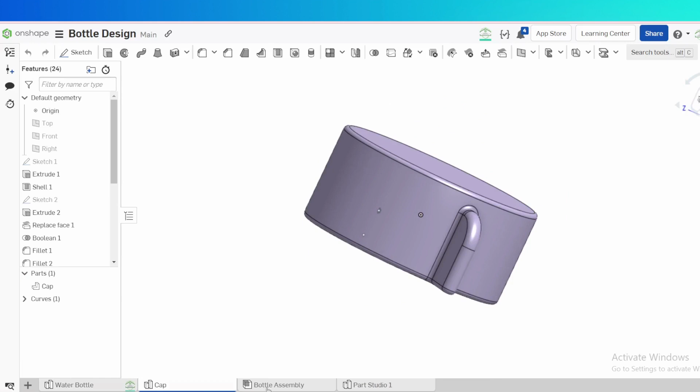Today I'm going to model this bottle in Onshape. I'll be using hybrid solid and surfaces. Then you can model a cup. Cup is simple to model the bottle cup. Then you can do assembly of the bottle with a cup, and you can do some small animation. You can animate how the cup opens like that if you want.

Okay, for me I'll focus on the bottom section. I'll focus on this bottle cup. Not the bottle cup, the actual bottle. I've started an actual part studio that is Water Bottle 2.

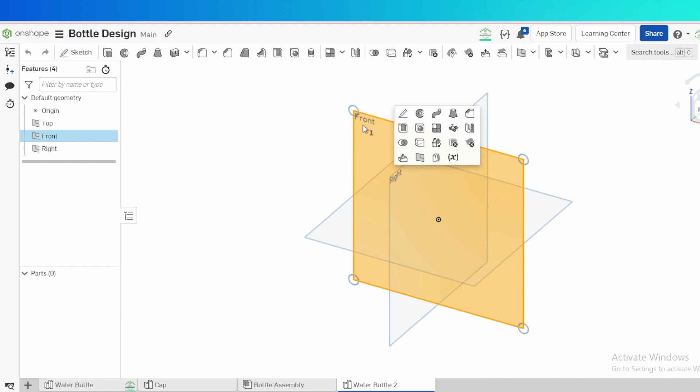Open here, and we need to create our first sketch to define this body. You can see this curve here to define the body. Therefore, we start with an actual body on the front plane, sketch on the front plane.

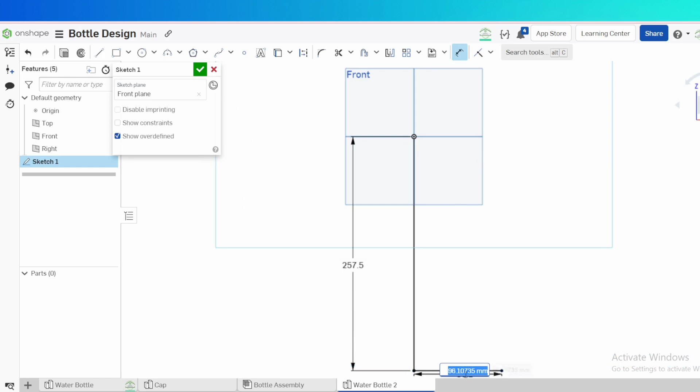First of all I need the line here. Dimension this line as 257.5 mm. Then another line here on the bottom to be 37.5 mm.

You can hide the planes. You don't need planes here. Then another line of length 5 on the bottom here. 5. One here. Another lines now. Bottom top lines like that, like that, like that. This one is 21.5.

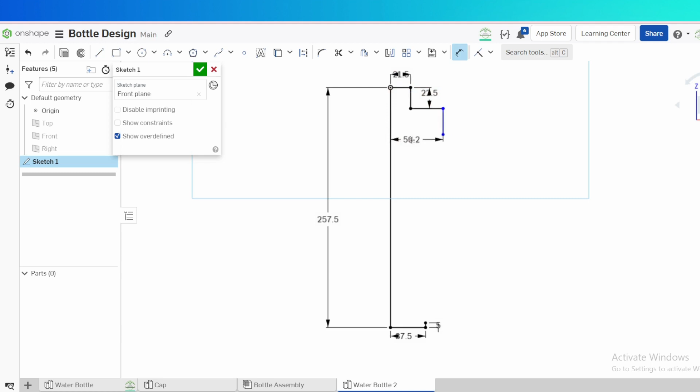This one is 22.5. And from this point to this point is 24.5. This height is 4.

Then we need a spline to connect from this point to this point. Therefore, spline from this spline, first point, second point, third point, and the last point, like that.

Let's now start dimensioning these points. Start by this one here. The length of this is 8. The angle here is the angle of 120. Then the length of this from here to here is 42.

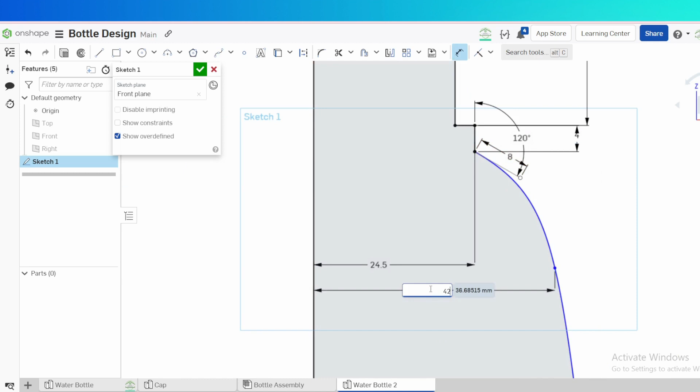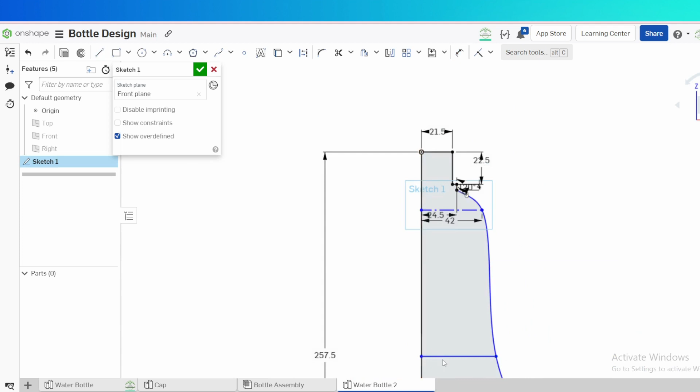Let me use a construction line for ease of dimensioning. Then another line here from this point to the line dimension line. Let's put a line here for ease of dimensioning. Therefore, from this line here to this line here, we have a 78. Then from this point to this point here, we have 116.

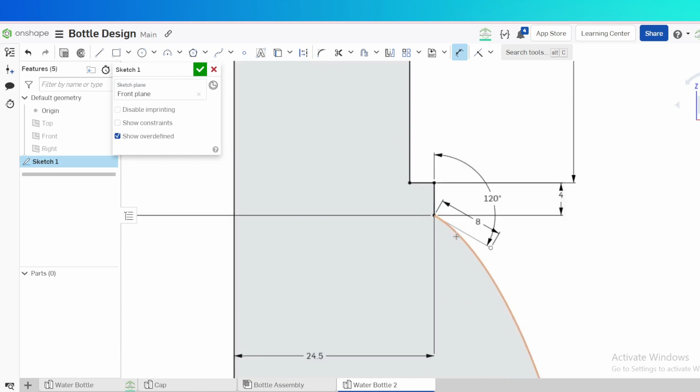What else? Of course, these two are tangent. That's by default. This one is 42. Then after 42, we have 37. It's 37.

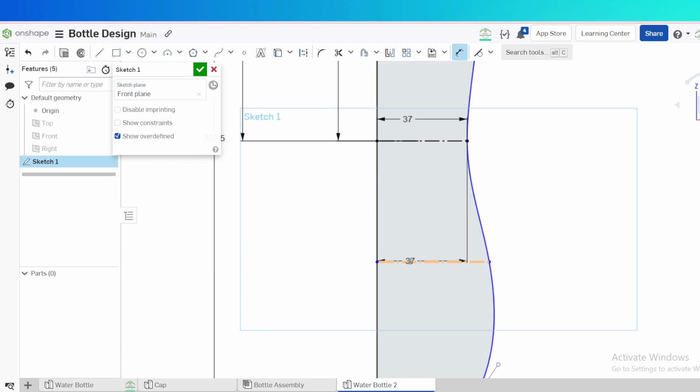Okay. We have another one here. Construction line. From this point here to this here. Let's dimension from bottom also instead of to this one here. It's supposed to be 115 by default.

Then from this one here to this one is supposed to be 35 and 42. Then this guys, now our guy here is supposed to be this, and this is supposed to be tangent. Then this is supposed to be short, 8.

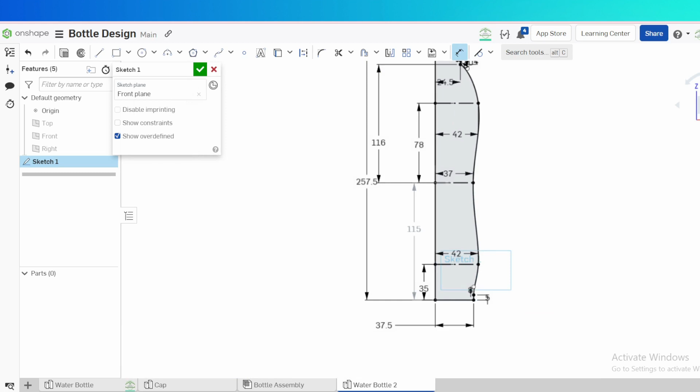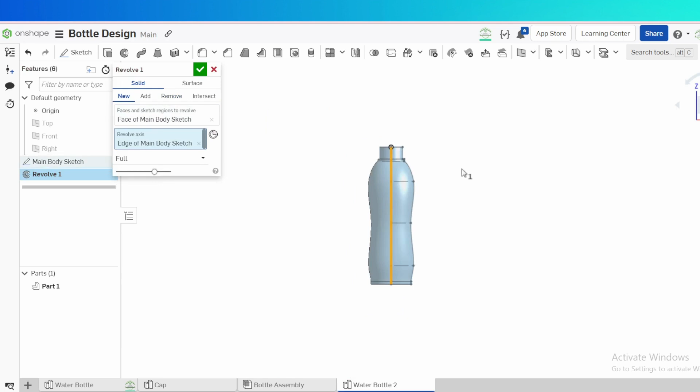Yeah, becomes fully defined. Our body is fully defined. Our main sketch, this one is called main body sketch. Now we can revolve a solid using this axis here, like that.

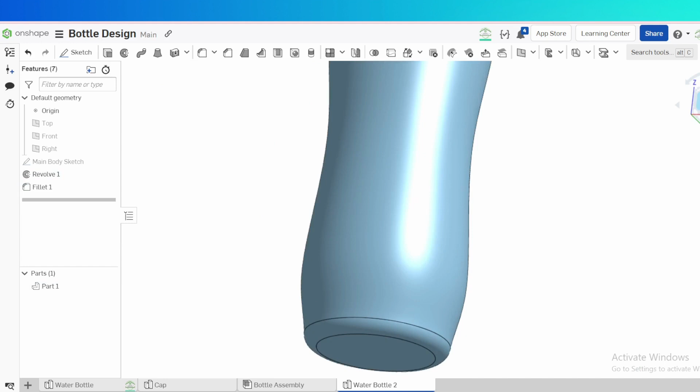Next, let's fillet this edge here by 7 mm. Let's create a cutout here. Therefore, I'll go to the front plane to sketch, and I want a small sketch here that I'm going to use to revolve, like that, like that.

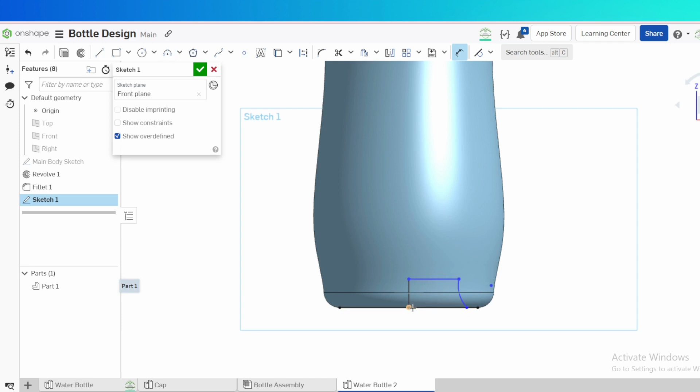An arc from this point to this point. This one is 23.5. This one is 4, 21.5 here, and this point to be horizontal.

If you can now revolve cut. Yeah, you can now revolve cut this part here. Remove. Yeah, you can see. You can easily fillet. You can fillet maybe 2 mm or 4. Let's go with the 4. No, go with the 2. Yeah, like that.

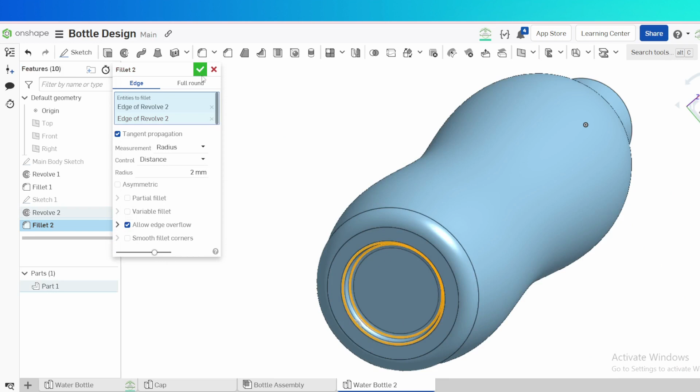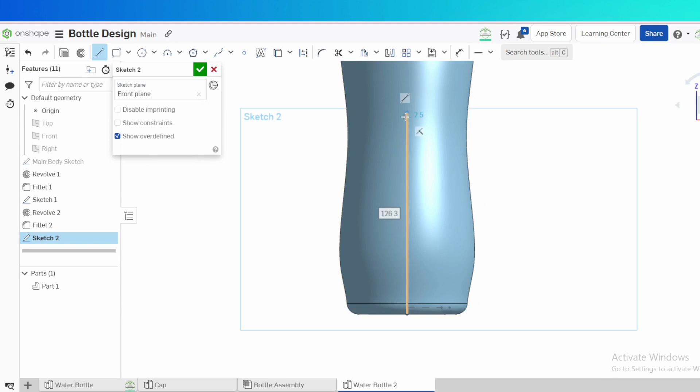Next is we need now to define some side cutouts here, those extrusions. We go back to front plane. Let me show this sketch so that I can use it. I need a line, yeah, like that. Dimension of this to be 116.

Then we need a line of dimension 30. Then the midpoint of this line to touch here. Then this is for construction.

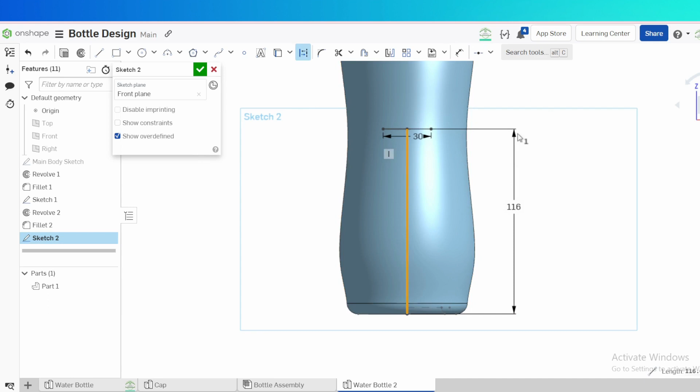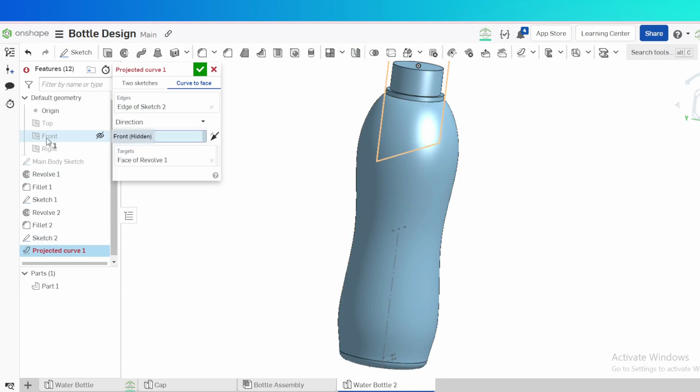Okay. Now I need now to project this curve onto this surface along front plane. It's a direction, front plane, reverse. Yeah, that's the direction here.

Then from top to this point, I need a plane like that. Then I need to sketch on this plane. Okay, let's sketch there. Let's change that to the hidden edges visible, because I want...

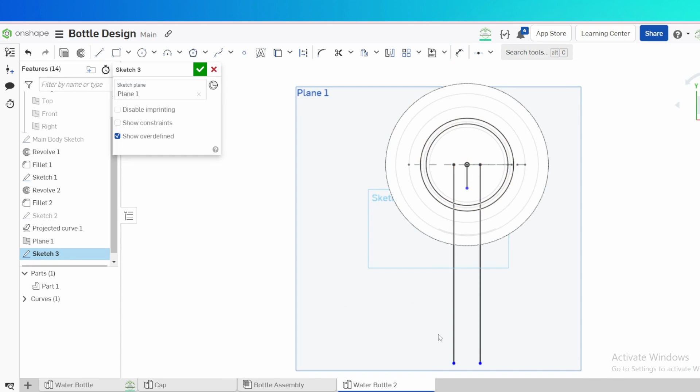This one here, another line here. Let's mirror this line to here. Dimension from this to this to be 13.9, to zoom. Let's see. These are just for construction, all of them.

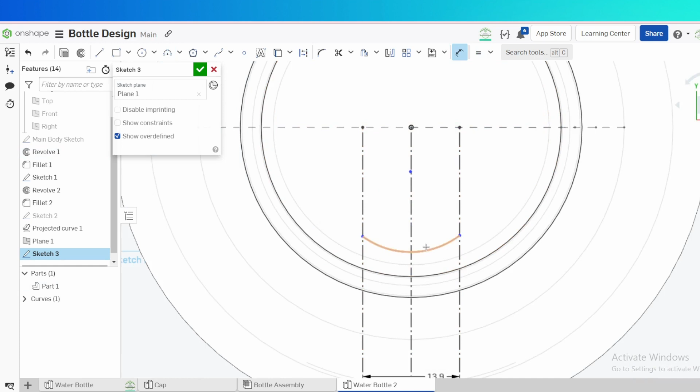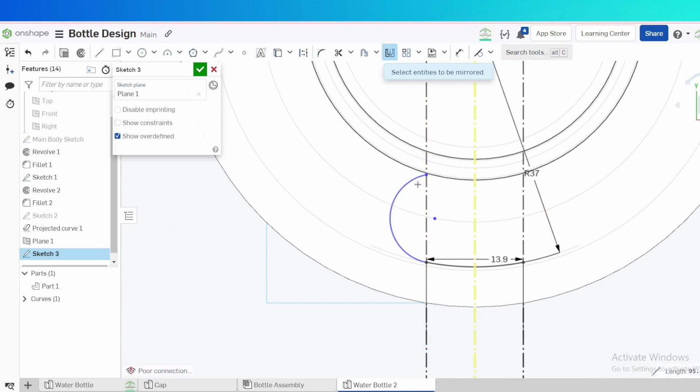Not a must to fully define them. I need an arc here, like this, of 37, with the center to be coincident. Another arc from this point to this point, like that. This arc to be tangent to this. Let me mirror this arc here, and this to be 12.

Okay, take care of that, that's fine. Let's go back to shaded and a plane at that point with respect to the front. Yeah. Oh no, no, no, with respect to the right. Yeah, right plane.

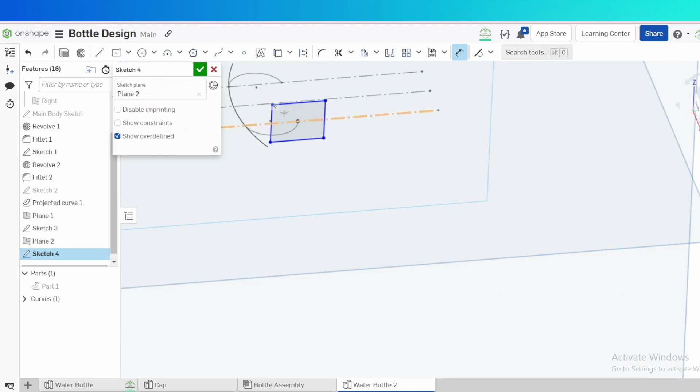Because I want to draw a profile for sweeping. I want to sweep, therefore sketch on this plane. Sketch a center rectangle with dimensions. This one is 8, this one is 8. Oops, what's happening? 8, 6.

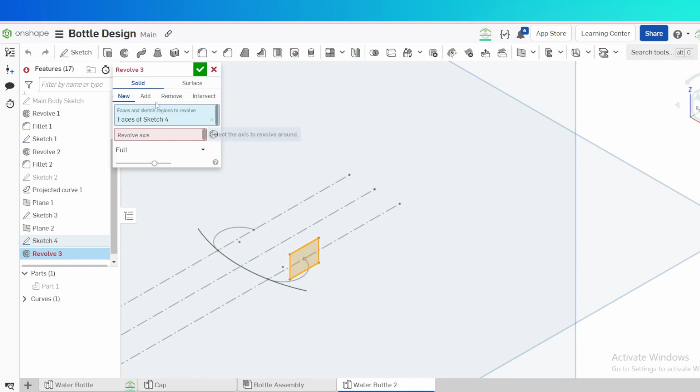Then let's sweep. We sweep this. We want to sweep, we want to add to the body. Not sweeping, revolve. Yeah, let's sweep. Sweep, sweep, sweep. I want to sweep this to this curve here, and I want to add to the body, like that.

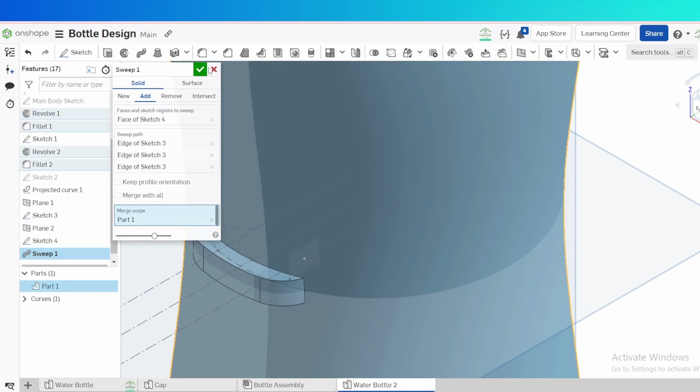Then let me fillet this full round. Maybe I can fillet later as the last operation.

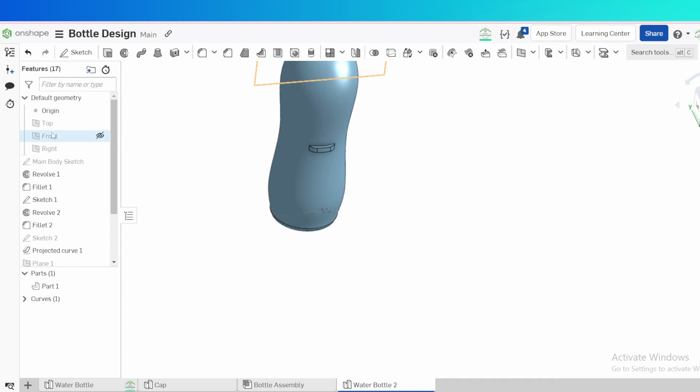Again, I go back to the front plane. I want to sketch a line here, another line, midpoint of this line to be coincident here, dimension from here to here. From this point here to this point here to be 25, also to be 25.

This is for the construction. Then we project the curve, this one onto surface, target this direction, front. Go back to plane one here, this point here, sketch on the plane, sketch on this plane.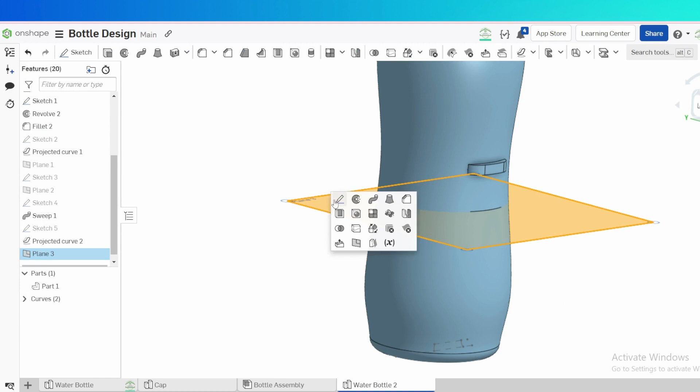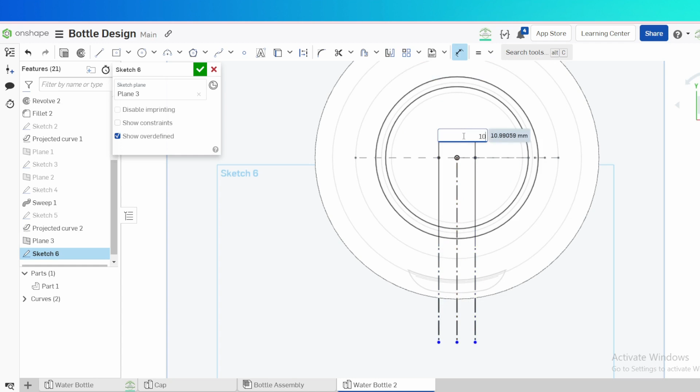Go back to hidden edges visible so that I can difference well. These two can be equal, but for construction, let's now do the mirror. Let's mirror this line here, and supposed to be 10. These two, the distance between is supposed to be 10. An arc that connects these two, this point to be coincident, dimension to be 37.8.

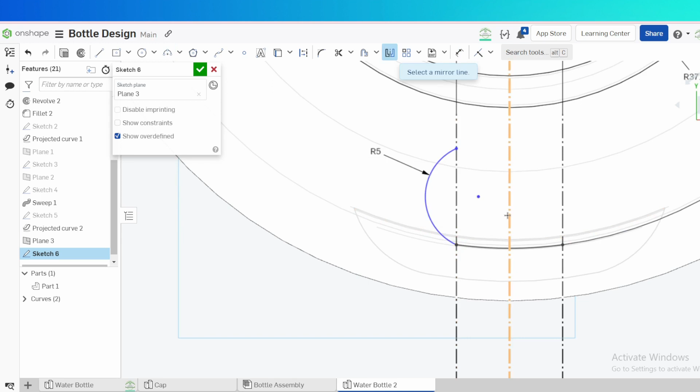Like that. An arc here, this point in the arc of 5. Let's now do the mirroring of this arc here, like that. Then this and this to be tangent, like that.

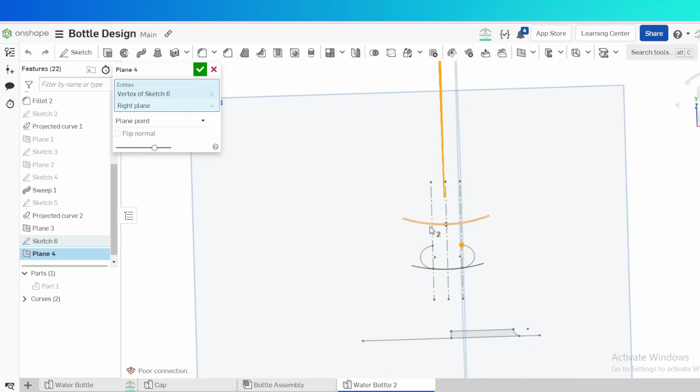Now I can go back to the shaded. Okay, I can hide my body at this point with the right plane. Then I can now sketch. Now I can easily sketch onto this plane, the one I have selected.

I need a center rectangle here with 8 by 5. 8 by 5. Go back, show the body. Then I need to sweep. This is the sketch path, our sketch here, like that.

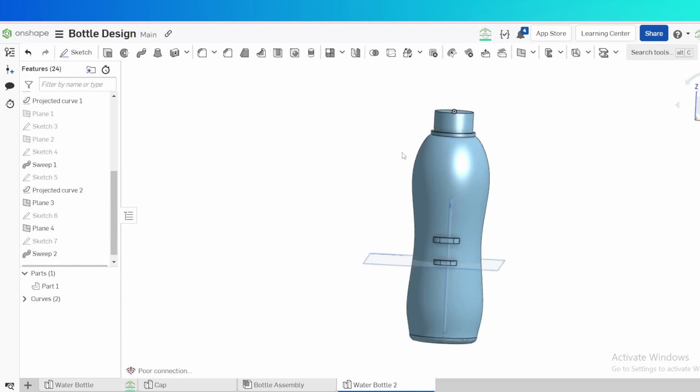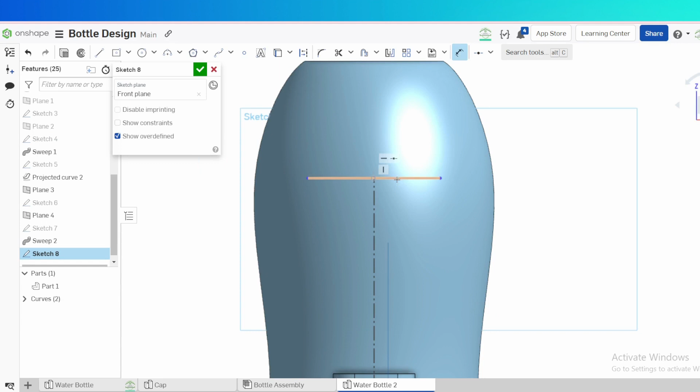Okay, you can see. Again, go back to the front view. Sketch normal to, fit line from this point to this point here, line for construction here, do like this. Midpoint of this line here to be coincident, dimension of this to be 25. Again from this point, let's use this point here, a dimension from this point to this point to this line also to be 25.

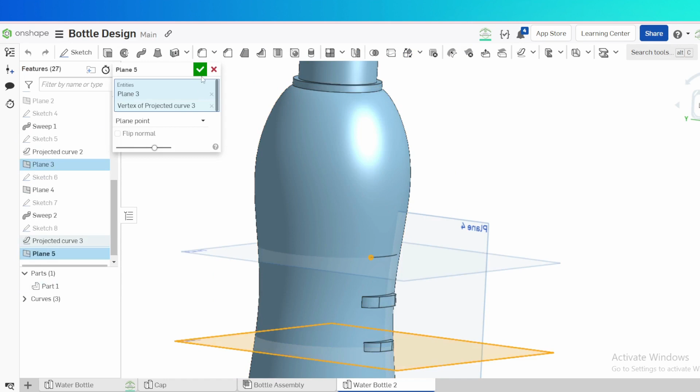Again, projected curve onto surface this edge, target this face, direction front. Again this one, this point here, plane. Okay, sketch on this plane.

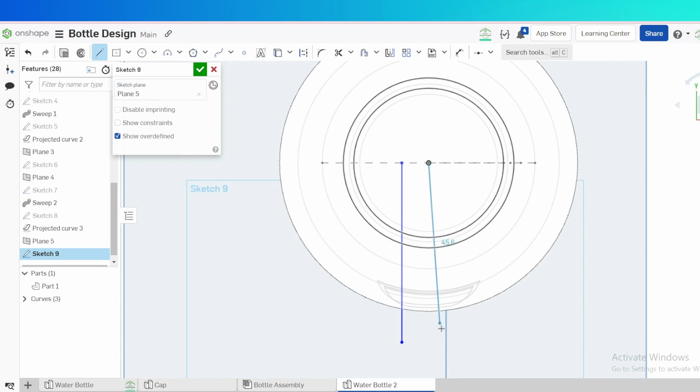I like this direction, sketch onto this plane 5, shaded visible, let's have that visible like that. These two for construction. Let's do the mirror of this, this dimension to be 10, an arc between here and here like that. These two to be horizontal, this point here to be coincident, another arc from here to here, this one to be tangent. We do the mirroring of this arc to this line here.

Then let's dimension, this one is supposed to be 5, 39.3, like that, fully defined, becomes fully defined.

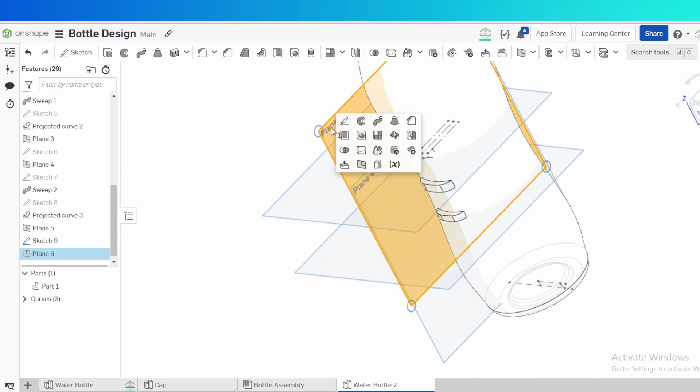Again this point with respect to the right plane, put a plane there. Okay, at that point there, my plane 6. Therefore on plane 6 here, sketch normal corner center rectangle at this point like that, dimension here to be 8 to be 5.

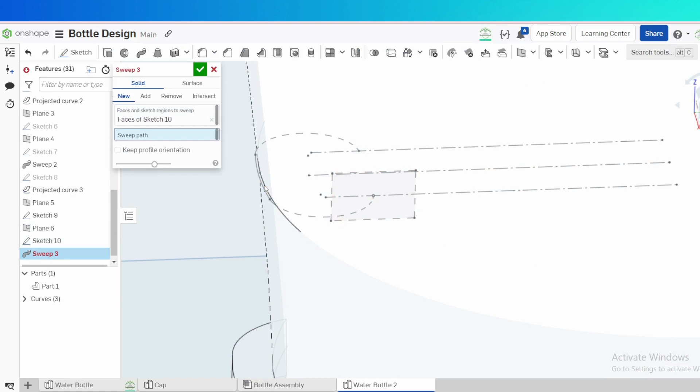Therefore, okay, we are sweeping solid of this sketch here, path of this path. Okay, we are adding to part 1 like that. You can hide planes, you can hide sketches. Yeah, therefore if we go back to shaded, that's what we have.

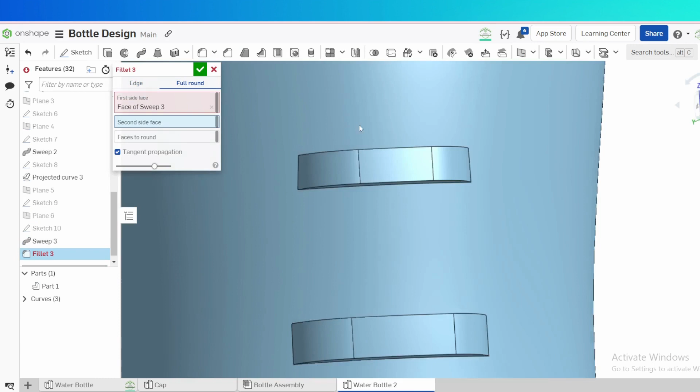Then we can fillet, full round this to this here, like that. You can enter if you don't want to repeat the command. If you want to repeat the command again, you press shift enter. Full round.

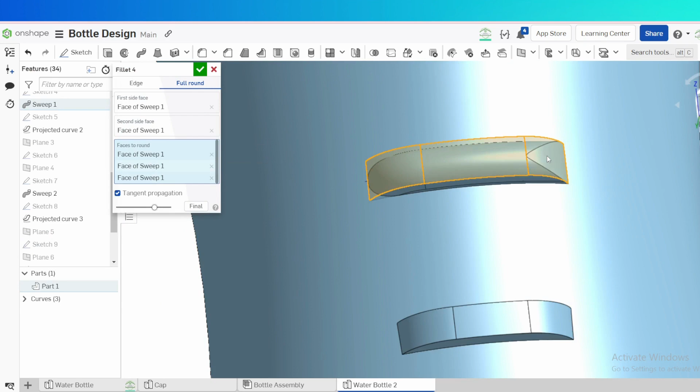This one has a problem. Let's go to this fillet here. Full round. What happened? Let's deselect everything. Select again, this one here, this one here. Then first allow this. Okay, fine.

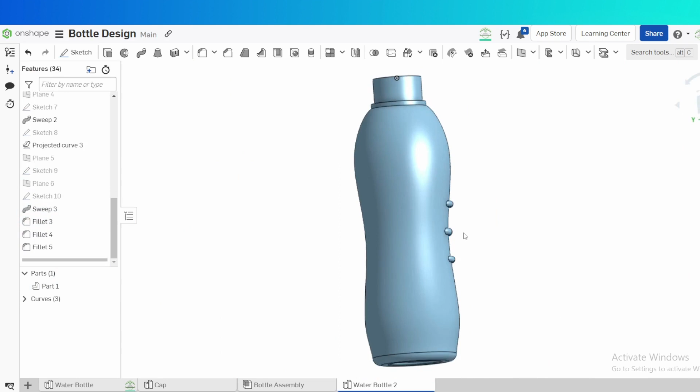Therefore, then before this command here, before this, I need to do something. I need to offset this surface before this sweep here. Therefore, I'll go back to the sweep 1 here. Let me roll to here, do an offset because I'm going to use a surface there. Then roll back, roll to head.

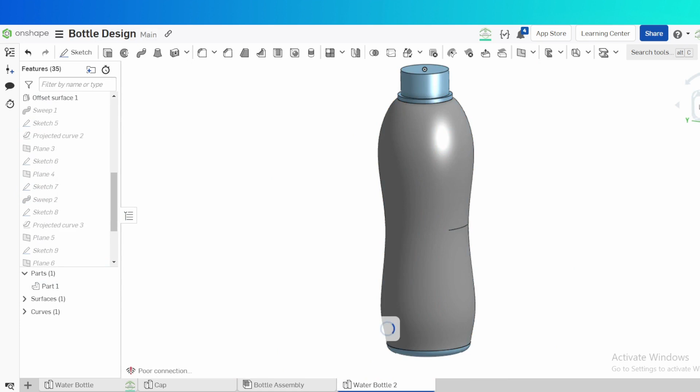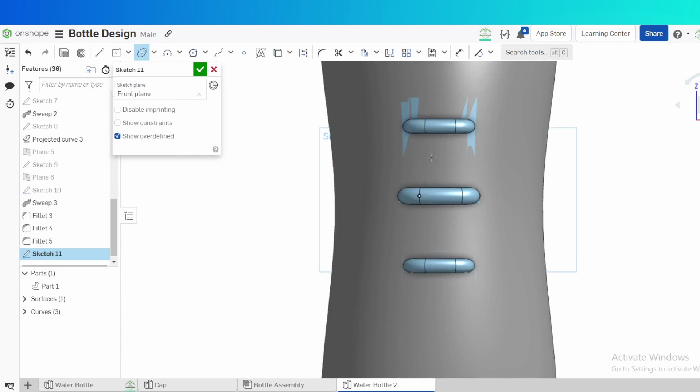Now I want to go back to the front plane, sketch normal. I need a point here, because basically I need an ellipse like that. This to be 90, this to be 60.

Then I need this point. Let me use this line again. I want to assign the line here and this to be vertical, this point and this point here to be horizontal. This one to be for construction. Okay, it seems my ellipse is not right.

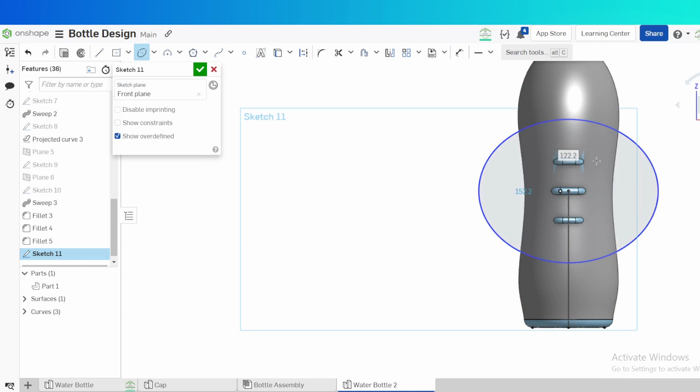Let me delete this ellipse and draw it again at this point here. Go vertical, go horizontal, to be 90, to be 60. Yeah, now it is okay. You extrude the surface of this sketch here.

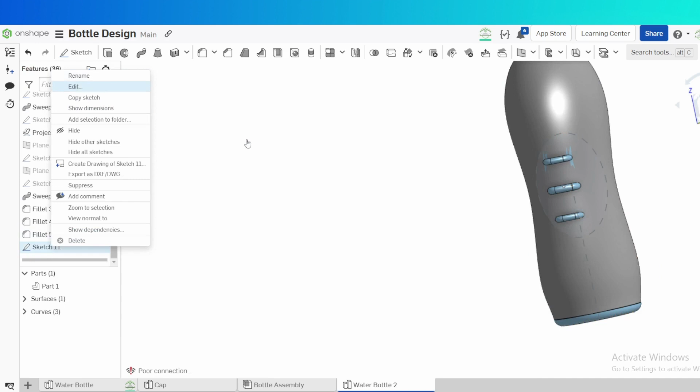Go back to sketch 11 here, make this line for construction, then select the sketch and extrude the surface. Symmetry, extrude as much as you can. That's fine. I want to trim this section here.

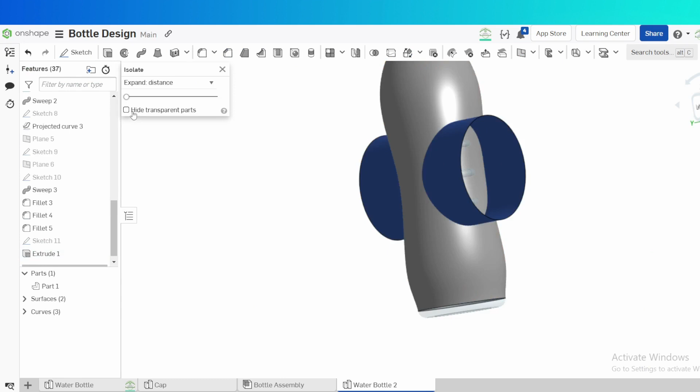Let me isolate the surface and hide the transparent. I want to delete this middle section. Therefore, I'm going to use mutual trim of these two surfaces.

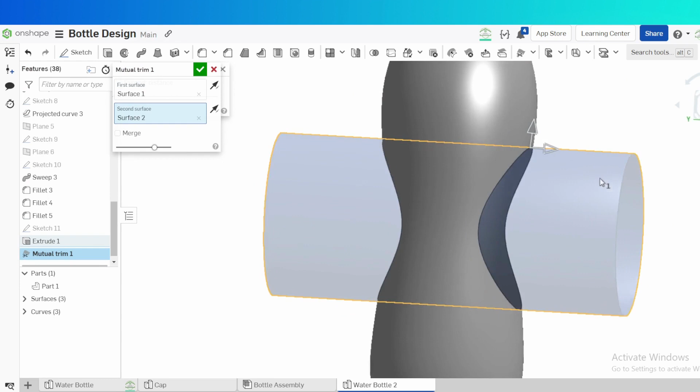I want top section to remain, outer section also to remain for these. Yeah, that's fine. Now I can hide this. Also can hide this because this is what I need, this surface.

Again, go back to the front plane, sketch normal. Let me show this sketch here because I'm going to use it. Symmetry, these two equal, this and this to be equal. Can dimension if you want, but make sure it is outside the surface.

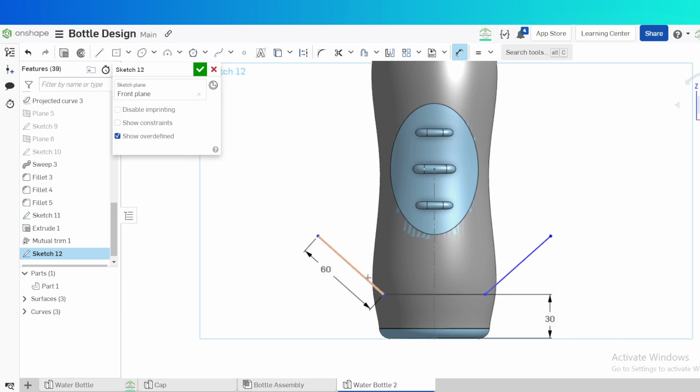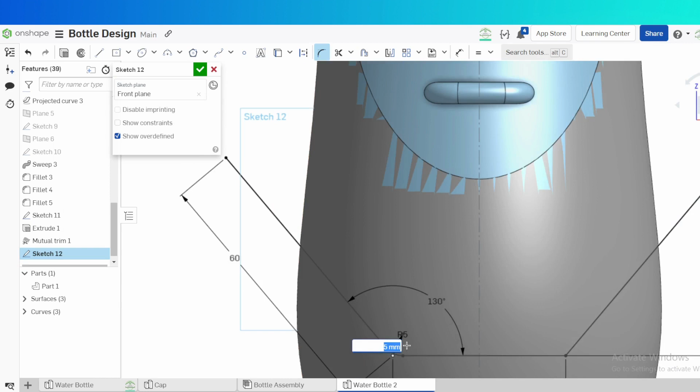This to be 30, this to be 120, 130, and this to be 60. Fully defined. Before extrude, we need a fillet of 5 at this point here. Also the same value. We can extrude a surface.

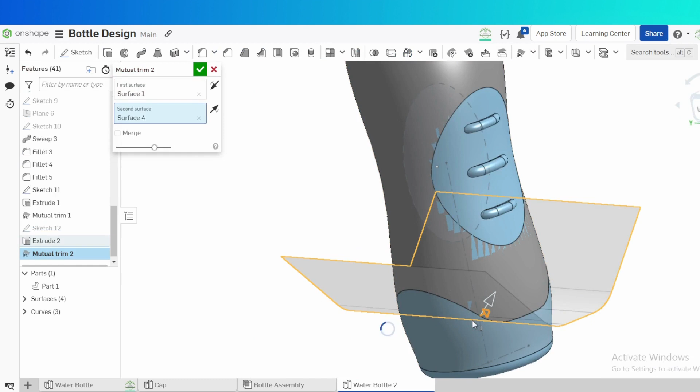Symmetry like that. Then again we can do the mutual trim of this and this. Yeah, and delete. That's what I need. You can hide those sketches like that.

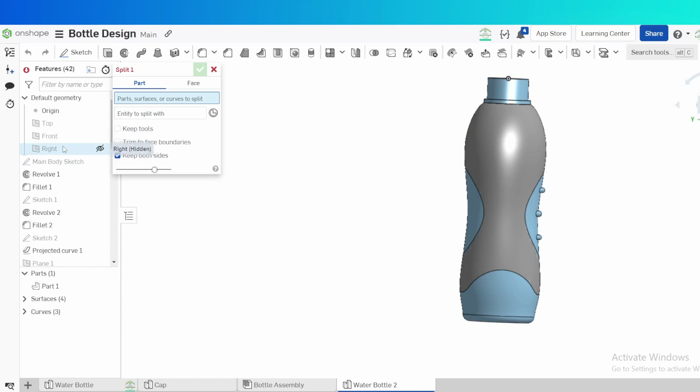Now I want to split this body using front plane, because I want to delete this and I want to mirror back this, mirror at the front plane, because I want to transfer these bosses to this side.

Then I can thicken this by 2.5 or 1.25, 1.25 both sides. Add and merge.

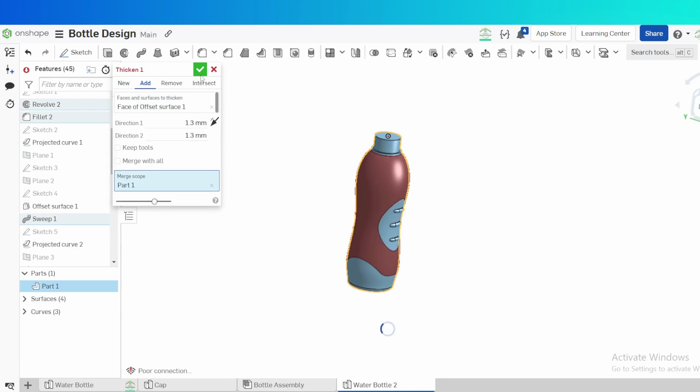Before I do that, let me go back to split here. I need to do the same thing on the top section. I need to split this surface on the top section. Same case applies. Go back to the front.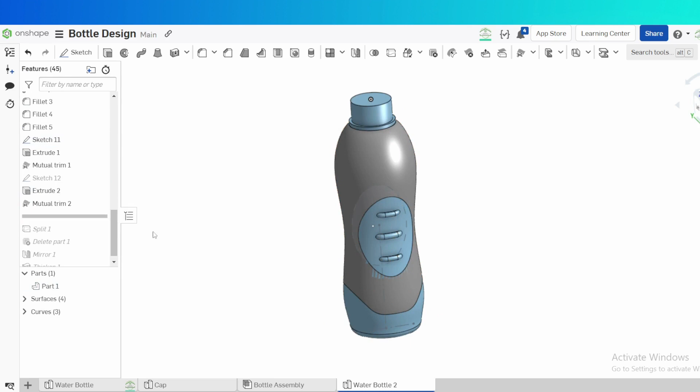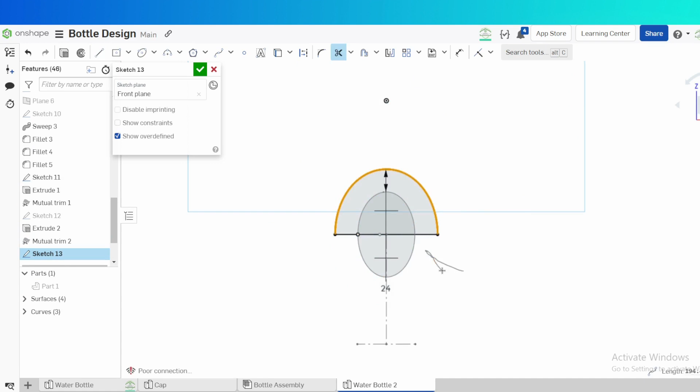I need this sketch to show sketch 11. Go back to the front plane, sketch normal. Hide these guys, also hide surface. I want to offset this by 24, align here, because I want to trim this bottom section for construction.

Now you can show your surfaces. I want to extrude the surface here, symmetry, same case, like that. Go to the mutual plane, mutual trim, this and this.

Yeah, that's fine. Now I can delete these three. This and this. Delete. Don't need them.

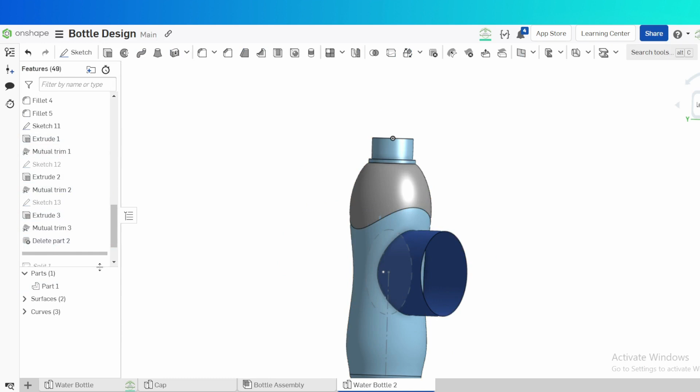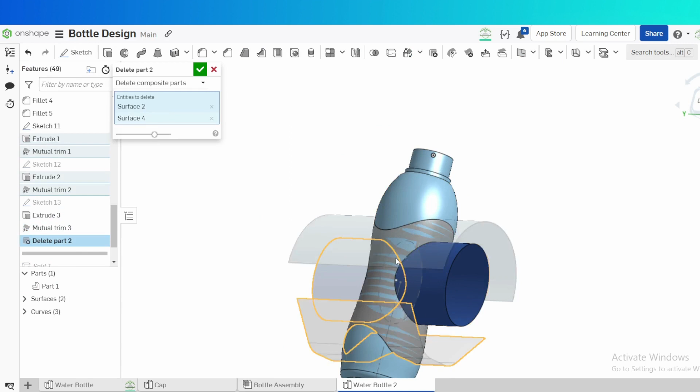In this trim, go back to trim 3. Something happened, the selection of this needs to be down. So now I can delete this one here, this and this. Now you can easily go back to the head.

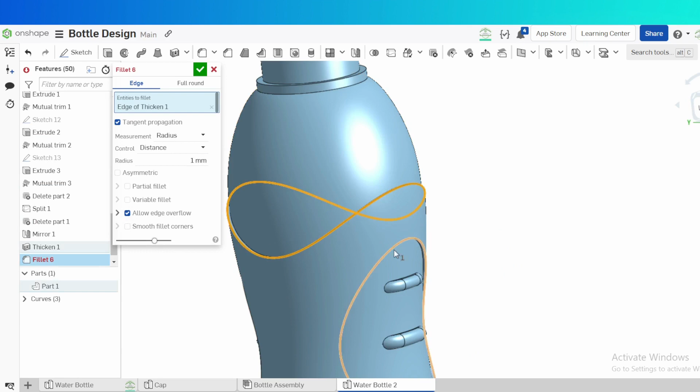Shift H to hide sketches. I want now to do a fillet: this edge, this edge, this edge. Also this edge.

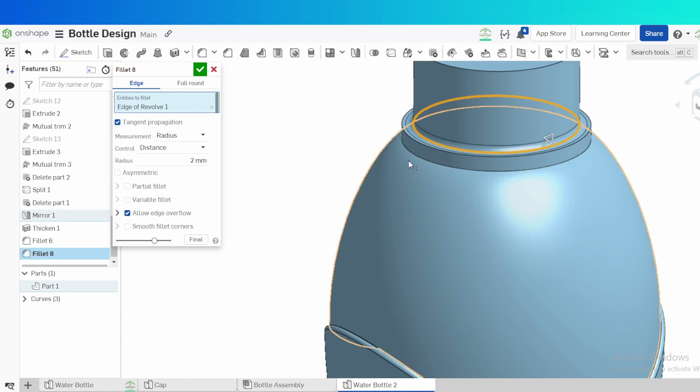Again fillet. Sometimes fillet takes some time to regenerate. This edge, this edge, and this edge here. Let's put a 2. Okay, that's okay. Now you can shell by 1.

You shell by 1. Next, we need to figure out how to put threads. Let's see what happens. Okay, I think we can shell later. Let's first put the threads here.

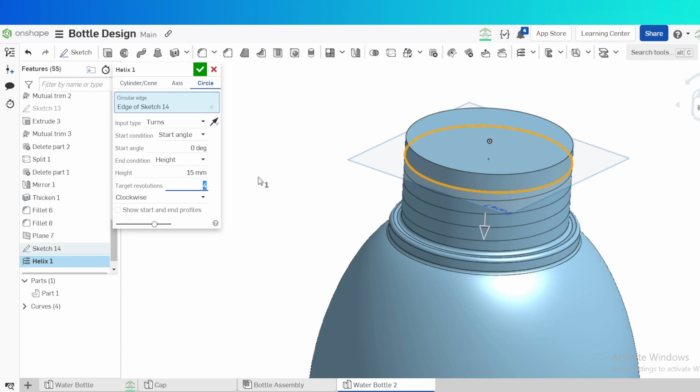On the plane here, offset by 5, opposite direction. I want to sketch on this plane and use this arc like that, because I need this circle, because I need a helix made of a circle. This curve here, interchange, go to 15, 4, go to 13. Yeah, 13 works, that's fine.

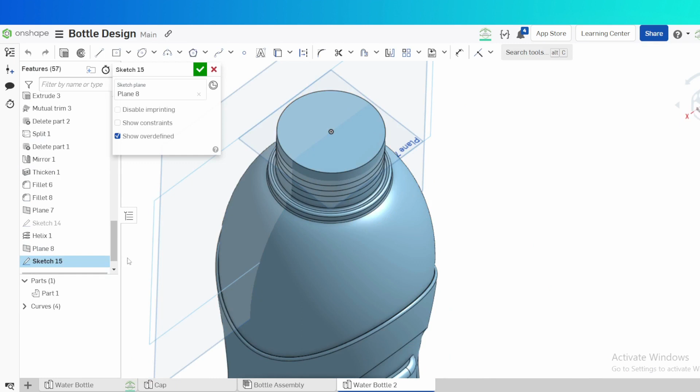Then this point here, look for a plane that is perpendicular to that point, like that. Then on this plane, sketch. You can hide this, hide your path. Use this point. Now you can hide your curves. I need a small one, like that, like that.

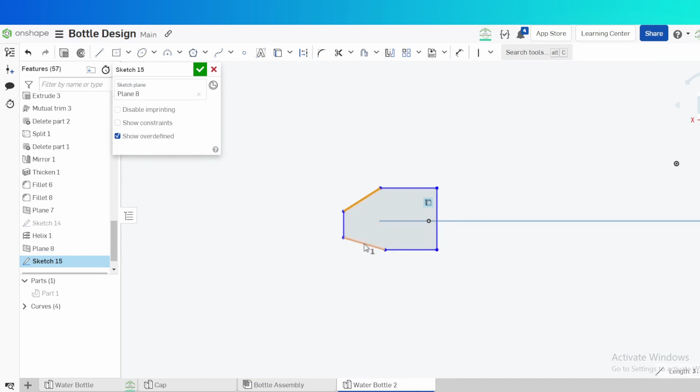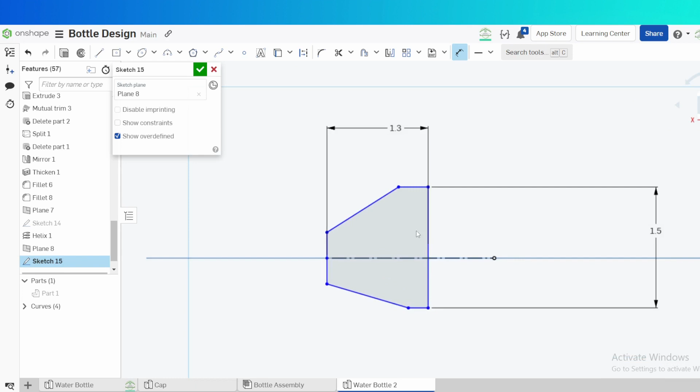1.5, 1.25, 1.25, 1.2, 1. Oops, has to be symmetry. Yeah, like that. Then this has to be 0.5.

Okay. Then, I think this is okay, this can work. Let's go back. Let me show my curve number 4.

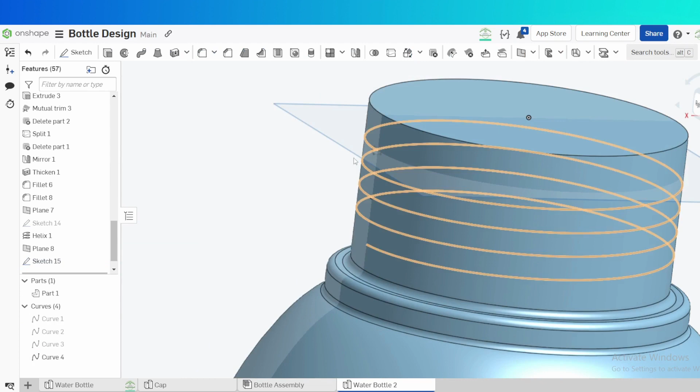Now I need to sweep, need to sweep solid this sketch here to the path like that, and we need to add to the path like that. Yeah, you can now press Shift H to hide sketches.

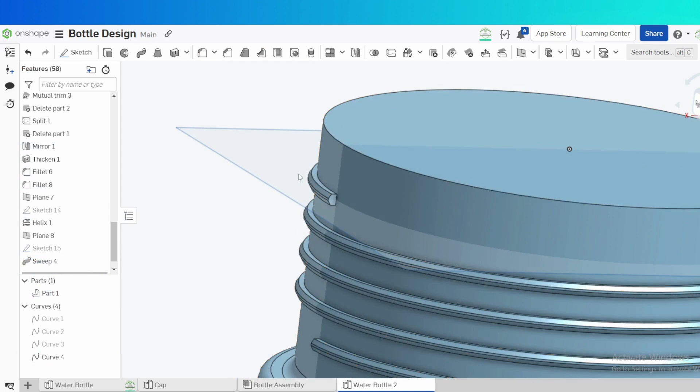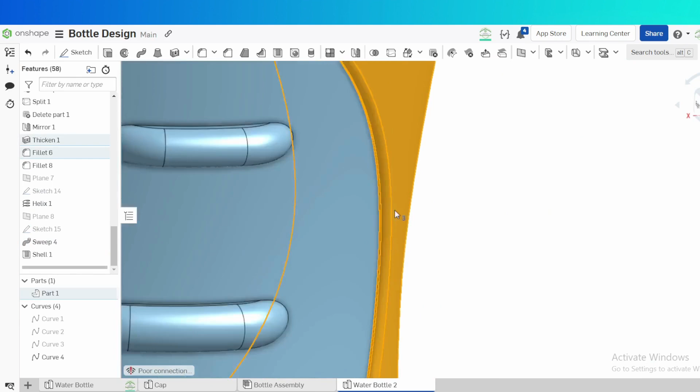Then now you can activate your shell. Now you can add appearance to this face. We can add appearance, maybe you can use this depending on your preference. Then you can add appearance to the whole body depending on your preference.